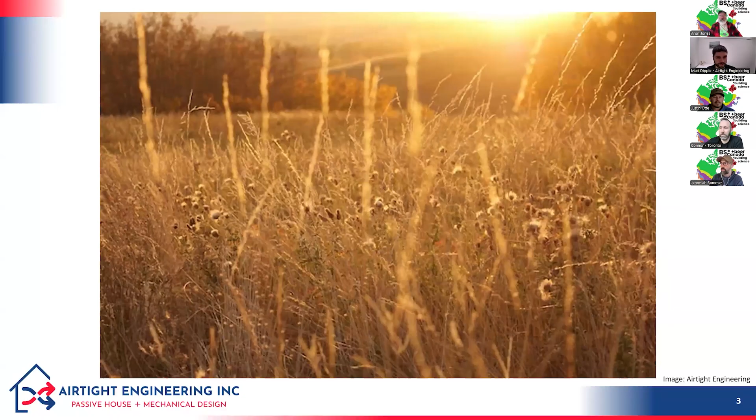Let me start by just a little land acknowledgement. I'm on Treaty 4 territory here in Regina. And so I know that we're all spread over the country, but I'm in the homeland of the Cree, the Saulteaux, Dakota, Nakota, Lakota, and also the homeland of the Métis people as well. And it's a picture that one of my colleagues took. I think this is his farm. His farm is on Treaty 6 territory, but a pretty nice prairie golden hour photo for you.

So here's my 5 themes that I want to talk about today. So first, client expectations. This is something that we've been learning lessons in, some the hard way, in terms of building high performance, and people who are used to a certain type of building and are now living in or working in or occupying a different type of building. Because lots of us don't come from high performance buildings when we first buy a passive house or a tier 4, step 4 home, or step 5 or tier 5 home, or net zero, that type of thing. That hasn't been our experience necessarily in the buildings that we've grown up or worked and played in.

The second thing I want to talk about is moisture in cold climates. Just a few interesting things that we've learned dealing with moisture in high performance homes in cold climates.

Third, I want to talk about heat pumps. And then my last two topics are a little bit zoomy outy, kind of philosophical. The first one is not just good on paper. So how can I, as a designer and consultant, how do we translate things from design into an actual good building? And then finally, how to think again. So some lessons that I've been learning very recently on changing or maybe not changing the way that I think about things, or helping other people change the way that they think about things, such as building science. So that's what I'm going to go for.

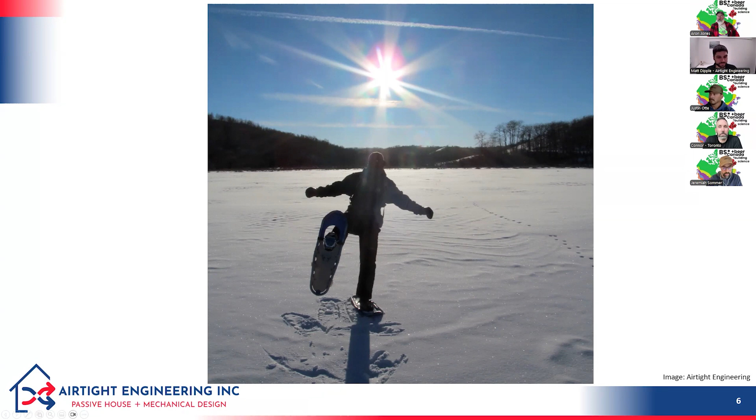Okay, theme number 1 that I want to talk about is client expectations. Let's do the first example. This is a project that Justin knows, actually, and it's a project that we visited together a couple weeks ago. It's a house in Saskatchewan, not too far outside Regina. And they've been having some troubles with cooling. The owner of the house, his thermostat is set to 21 degrees, and his cooling system will only cool the house to 22 degrees. Now it's a heat pump, a water-based system, so it's an air-to-water heat pump, and we were trying to figure out what the issue was.

But that's not what I want to focus on in this particular example. It was very interesting that he wants his house to be at 21 degrees, even if it's 35 degrees outside. And from a mechanical perspective, that's a pretty big ask. Often we're designing cooling systems to keep houses at 22, maybe more like 24 in the old days. The recommendation was peak conditions, you keep your house at 24. If your cooling system can do that, then it's good. But now there are clients who want their house to stay at 21 when it's 35 degrees outside.

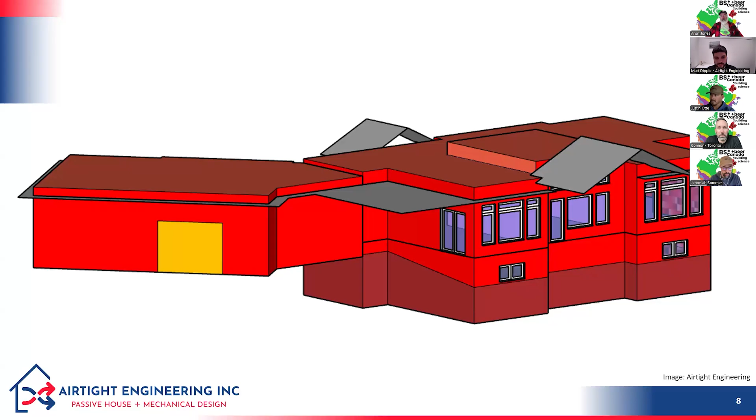Versus another project, this one's in Canmore. This is a passive house project in Canmore. The glazing on the second floor there is facing due south, but it's very overglazed on the second floor. And something that I found fascinating when I was at this project last week with this gentleman who was concerned about his home overheating by 1 degree above the set point was this Canmore house. The homeowner has maybe 10 days a year where it gets really hot up there. So it's usually in the spring or the fall when you have that low south sun coming in that big glazed window.

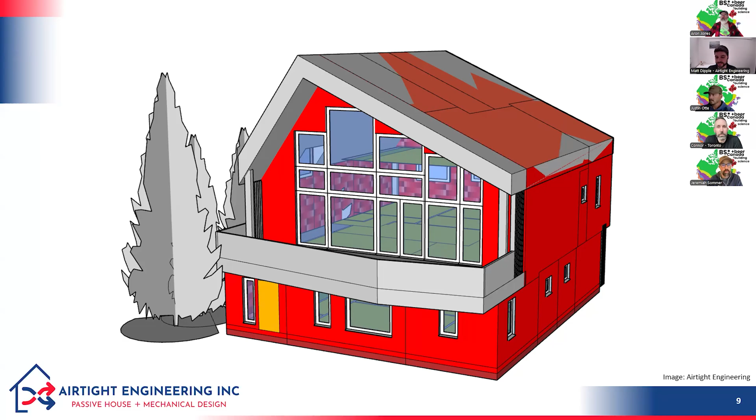And this is something that we had raised when we were doing the energy modeling for this house. We said, hey, look, you're doing really great in terms of meeting the passive house standard, but you're going to have a lot of troubles with overheating in that particular room just because it's quite overglazed compared to all the other rooms of the house. And they acknowledged that that was sort of a risk that they were willing to accept and went ahead and built the house.

And his attitude, he has 10 days a year where it gets up to like 28 degrees in there. And he said, I'm okay with it. It's only 10 days a year. It's not a big deal. We just keep the butter in the fridge those days. We don't leave it on the counter. And that was his solution. He was happy with it. No more work needed on this particular project.

So to me, this is a very interesting example of how much the client's expectations make a difference in terms of some of these high performance projects, and whether something like overheating is a callback or whether it's just, oh, here's a quirk of the house. So this is something that we've been trying to incorporate more into our practice, doing a better job up front when we're designing or consulting on a high performance home, of understanding what the client's requirements are. Like, are they going to be miffed if they're a degree off?

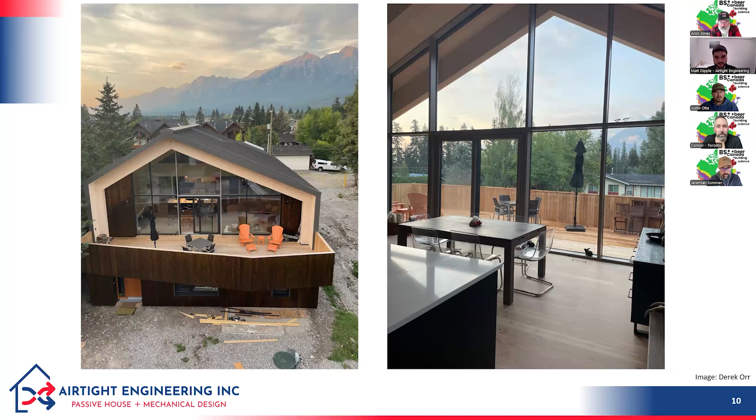And I'm saying that with no judgment. If you want your cooling system to be able to cool to 21, that is a perfectly legitimate desire, right? And for some people, that's a make or break, and for others, it's not important. So just an interesting example of how client preference drove one project to have some callback work required, another one to not have callback work required.

So the homeowner on this one assumed, hey, I'm going into a high performance home. It's super energy efficient. It's heated with this very tiny heat pump. I'm going to pay next to nothing on my energy bills. So they were very surprised when January rolled around and they had, I think it was like a $400 bill for their electricity. And something that we had not done a very good job of communicating up front was the impact in Saskatchewan of switching from natural gas heating to electricity.

And so on this project, their heat pump probably on average is like 200% efficient over the course of the year. However, natural gas is 7 times cheaper than electricity in Saskatchewan. So if you do the math, you're still paying 3.5 times as much for your energy if you're heating with an electric heat pump versus with natural gas. And they also weren't used to seeing heating and hot water on their electricity bill, right? They're used to that coming as a separate bill.

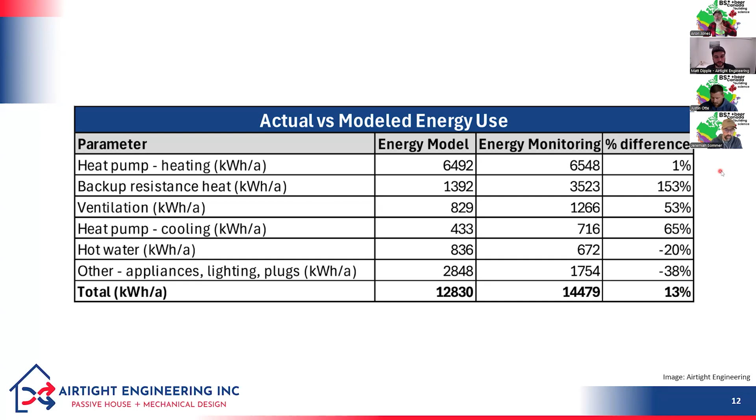So that's something that we've learned with high performance homes and something that we're really clear with people at the outset about now. Of course, your mileage may vary depending on where you are and what your power versus your natural gas or other fuel costs are.

Another lesson that we've been learning recently is to communicate more with clients up front on what they're expecting in terms of controls and functionality with their heating and cooling system. So I come from the passive house world where our mantra is spend on the envelope so you can save on the mechanical system. So I think that's a really good idea. And that's kind of what I encourage.

But it turns out that for some people, if you're building a very fancy custom home, maybe it's going to be net zero, maybe it's going to be passive, but it's a pretty expensive endeavor. Sometimes you have some pretty specific controls and zoning requirements too that you want to see in your project, even if me as the consultant from Passive House Land says, oh, you don't need any of those.

So here's two projects, the mechanical room on the left and the mechanical room on the right. These are two different projects. One's in Saskatchewan, the second one's in Edmonton. And they're both very energy efficient projects. The one on the left is a much bigger house. But interestingly, the one on the left, they wanted a lot of zoning. So if you count our zone dampers here, got 1, 2, 3, 4, 5, 6, 7, 8, 9.

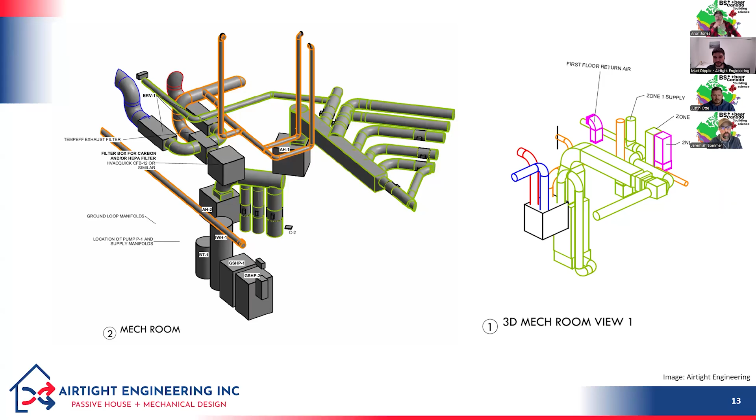And so, yeah, it was an interesting exercise for me to see how much 2 different clients, both building high performance homes, can have an impact on the design of the mechanical system in terms of controls, and how the opinions of the homeowners may differ greatly from my opinion as the consultant on what I think is best. So a good lesson for me.

And I think that this all came about, our obsession with zoning, when we started doing the whole dual zone in cars, right? Where it's like, oh man, somehow you can have these 2 knobs right beside each other, and there's some invisible air wall between the passenger and the driver's seat. And you've got yours cranked up 6 degrees higher than the other one. There's no way I believe that that's actually happening. But I'm blaming it on the car manufacturers, why we've got these high expectations in terms of controls in our homes.

So that's one of the areas where we have been doing a lot of learning and trying to improve our practice, in helping understand customer expectations at the start, and then also working on setting customer expectations out of the gate, right? So something like, okay, if you want a system that's not zoned at all and you have a 2-story house, that's great. Just know that it's going to be a degree or 2 warmer on the second floor than the lower floor, and that's okay, as long as you know that that's not a bug, maybe it's more of a feature for you.

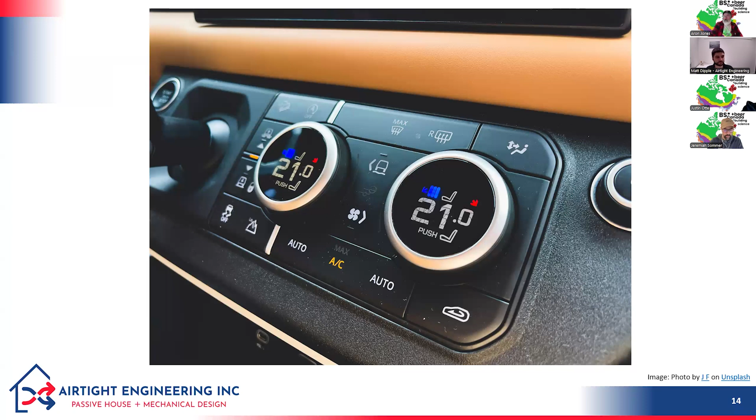Another thing that I'm just looking at: we need to invent cooling beds.

Hey, I remember my father talking about how they had a water bed back in the day, and you could heat and cool the water bed, different sides. The water bed was pre-me, but apparently, if you left the heater on the water bed off, it was very unpleasant, and it took like 8 hours to warm back up. So, would not recommend.

The second theme I want to talk about: a lot of these learnings are coming from a passive house project that we've been working on in Winnipeg that was finished a number of months ago and actually just received its certification, which I think might be the first certified passive house project in Winnipeg. I'm not positive, but if it's not the first, it's in the top two or three anyways. So we've got some learnings from that project in terms of dealing with moisture in cold climates, and a couple other projects as well.

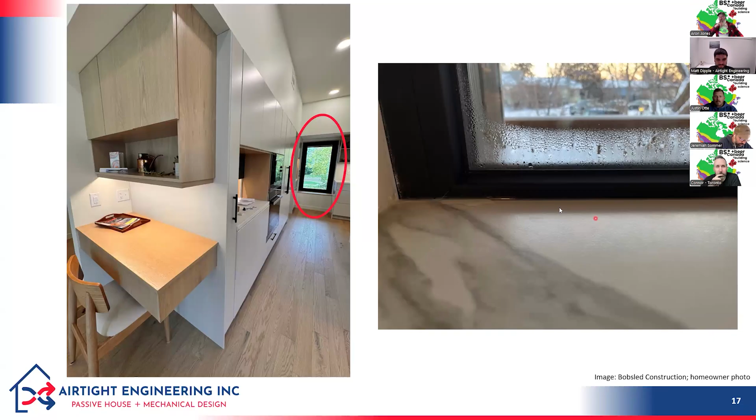So another issue that we ran into on this same project was another condensation issue, on the preheater. Because it's so cold in Winnipeg, Passive House requires continuous ventilation, and to do that, we need a preheater on most of the ventilation units out there. So this ventilation unit, it's a Zehnder, and it's got this nice little preheater to keep the air coming in at minus 10 degrees. That'll prevent the unit from going into a defrost cycle and stopping the flow of fresh air for a period of time.

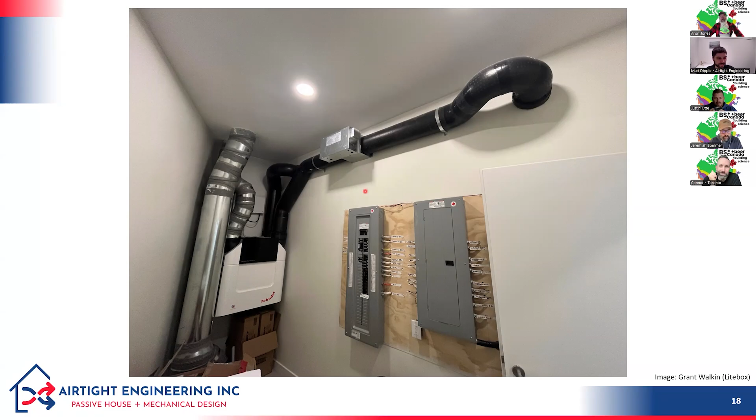But as you can imagine, this experienced some condensation. We did mention this at the outset, and it didn't get insulated initially, and so there was some condensation. Unfortunately, it happened right over the electrical panel, so that made it a little bit more urgent to address. The initial fix here was to insulate the section that the ductwork went through.

And we all thought, including me, okay, perfect, we solved the problem. The contractor did a great job. He insulated this section with some Armaflex, went away, and they still had condensation dripping out of it. What they found was it was actually condensation forming inside of the electrical box. Right here, you can see some ice building up even, because there was some airflow through this box, and this side is still really cold because it's not insulated.

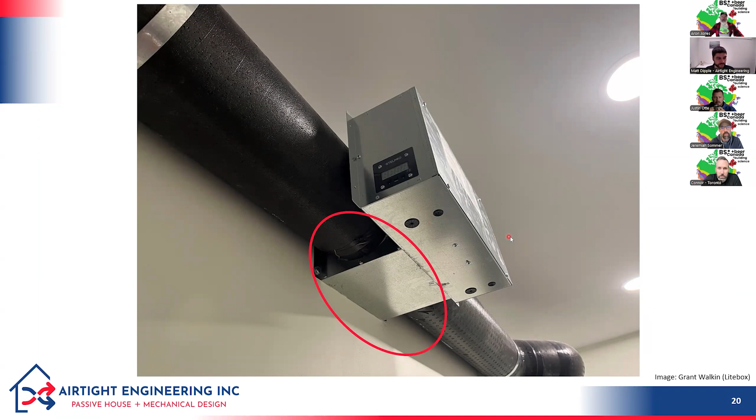So the solution was to tape this box and make it all airtight, and then to insulate the entire box. So here was the finished product, and this did the trick. They aren't having any water dripping on their electrical panel anymore. But this was way more intense of an insulation job than I would have expected.

Part of it is because my frame of reference for a mechanical room on the prairies is pretty dry. And this is a passive house, so even though it's a mechanical room with no people in it, it's a much more humid environment. It's maybe 30% relative humidity, as opposed to most of the mechanical rooms I find myself in, which are probably like 10% relative humidity. So there was just a lot more moisture available, and when that duct has any cold surfaces, especially as cold as minus 10, it's going to start to condense in a hurry.

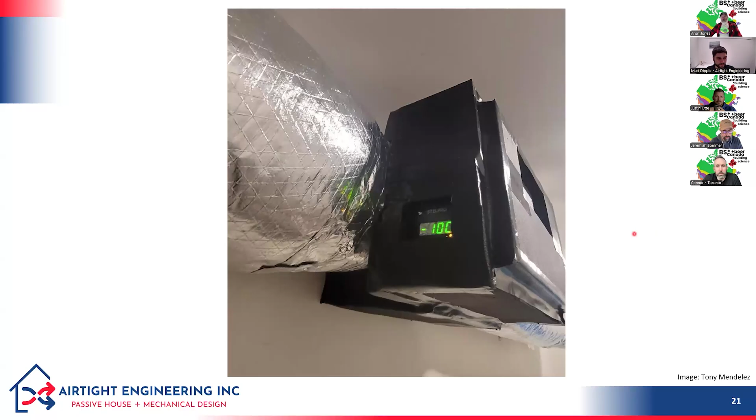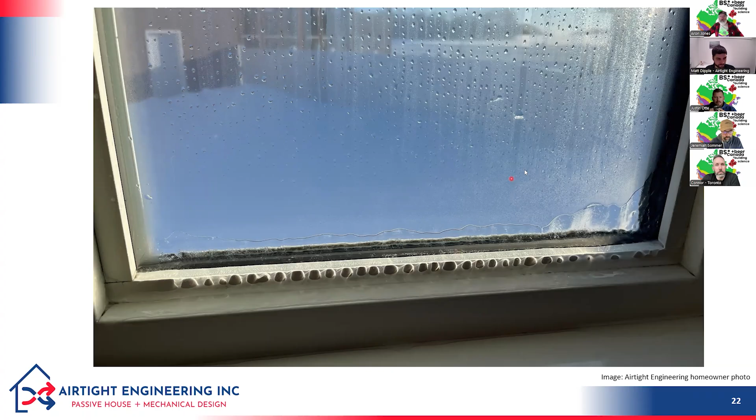This is a different project now. This one's about an hour and a half away from Regina. This was an existing house that was built, I think, 6 or 7 years ago, and the homeowner was having issues with condensation on their windows. Specifically in the winter, you can see there's a lot of condensation on this window, and it's freezing. It's creating some ice damming, and it was creating some mold behind the trim as well. So they were taking some trim off. I think they were unfortunately getting lawyers involved.

Our client wanted us to assess what the issue was. They were figuring that it was the quality of the windows; they were poor quality windows in their estimation, and that was what was causing all that condensation. So I did a bunch of work with them, reviewed a bunch of pictures, interviewed the owners. I was going to do an in-person inspection; however, there was a blizzard bad enough to close the highways, so we had to do a virtual inspection via Zoom, but that worked out pretty well too.

What I discovered was the windows were certainly playing a role, because they were triple pane as the homeowner had asked for, but they were the cheapest triple pane money could buy. They were air filled, and they didn't have any low-E coatings or anything. So yes, the windows were cold, but the bigger problem was that the family was from the southern US, and they found it really dry in Saskatchewan. And they had a big new HRV in their house, so when they ran the HRV in the winter, it dried out their house considerably.

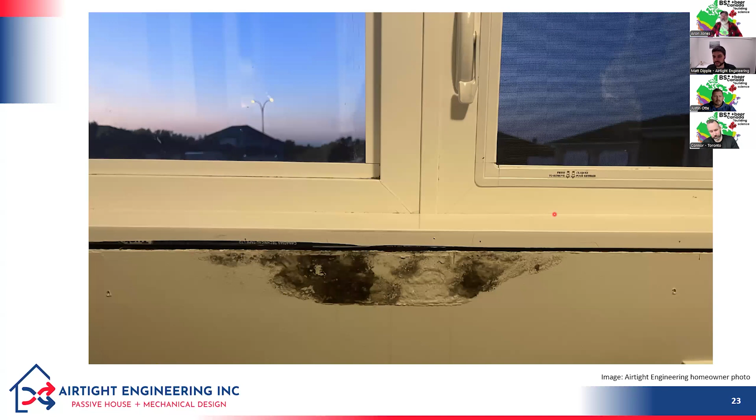So the lesson that I learned on this one is sometimes the obvious cause is actually not the full picture. And it was a really good lesson for me, or reminder, in this whole thing that we all talk about, this building as a system approach, right?

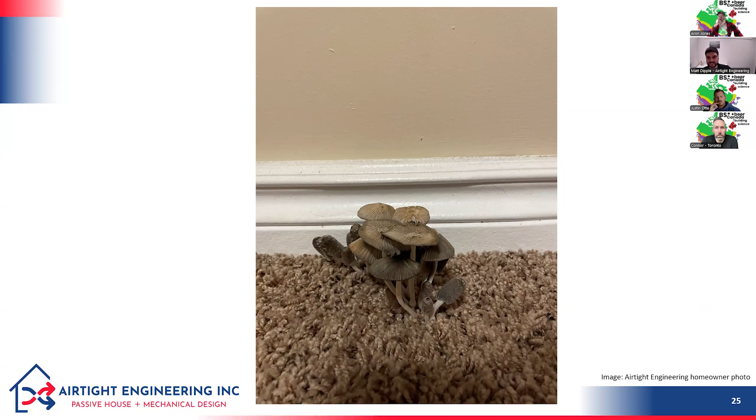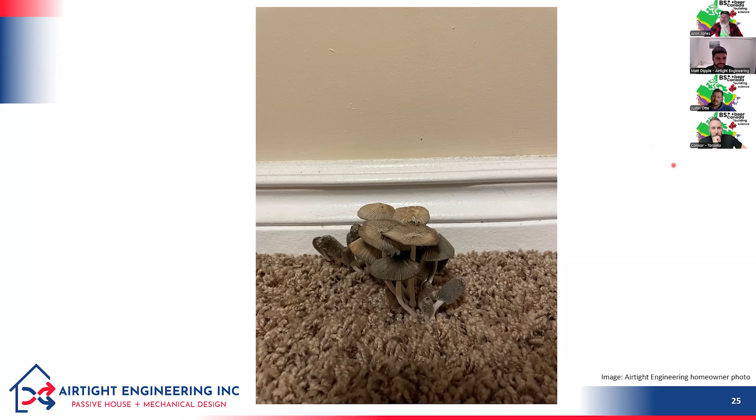And then this is just a fun picture, and slightly terrifying. This is what we're all trying to avoid in our projects. So this is not a project that we worked on, but this is a client in another capacity, and he moved out of this condo shortly after these mushrooms appeared. We asked if he tried any of them. He said no. And here's the zoom out.

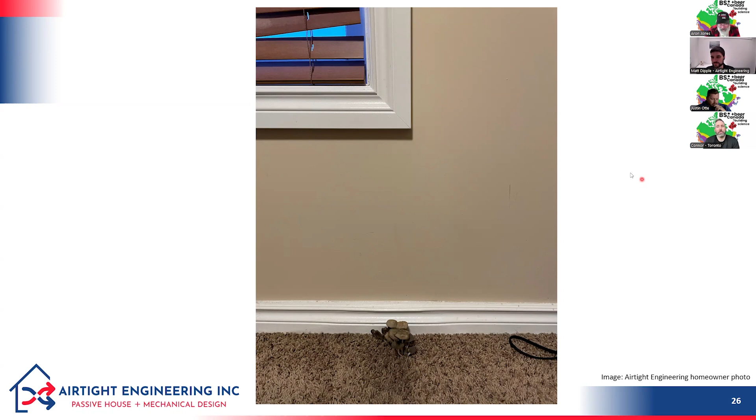So not surprising, it's happening right under the junction with a window. So likely, my guess is air leakage, some sort of poor sealing, air leakage in the winter, condensation, and then running back behind that drywall. You can see the molding's a little pudgy here too. So obviously some water going on there. So that's just a fun one. Only lessons learned here are don't eat the mushrooms in the carpet.

Yeah, that's right. And it could have been bulk water as well. Could have been poor flashing or something on the window for sure. I didn't have any pictures of it because the gentleman didn't send me any, but he did say when they pulled back the carpet, it was pretty bad. Mushrooms were not the only things growing under there.

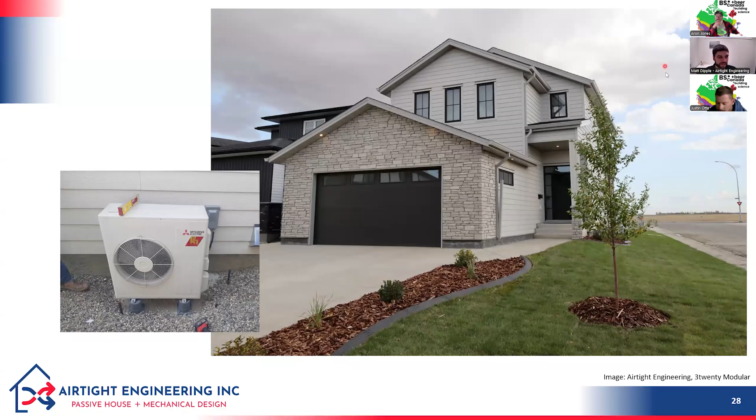Okay, let's talk a little bit about heat pumps. We're going back to the Saskatoon house and a lesson that we learned on the heat pump there, which was, heat pumps work in really cold weather. So this is a Mitsubishi Hyperheat, so it is a cold climate heat pump. It would be one of the most advanced cold climate heat pumps available.

I will say this was slightly puzzling because according to the manufacturer, it's supposed to cut out at -27, not -38. But proof of concept, the compressor was still generating heat 10 degrees below where it's supposed to cut out. So for all the naysayers about heat pumps in really cold places, they do work.

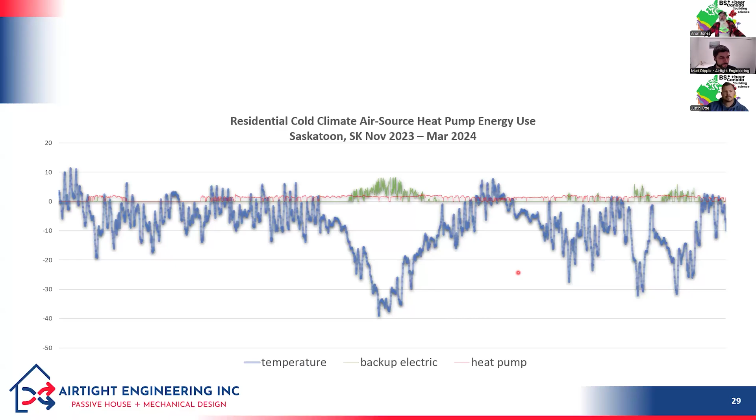A few other heat pump learnings in cold climates. Question: cuts out at -27 or COP is less than 1? On this particular unit, the COP is less than 1 at -27, but it should also cut out. That particular model is set to shut off the compressor at -27, apparently. So they did have to replace the board because it wasn't working.

This is a project that we did in Saskatchewan. It's called the Dumont Youth Lodge. So it's a youth lodge and camp close to Batoche, so not too far from Saskatoon, Saskatchewan. And this is an all-electric building. So it's heated and cooled with heat pumps. It's got some heat pump water heaters, and it's a pretty good envelope.

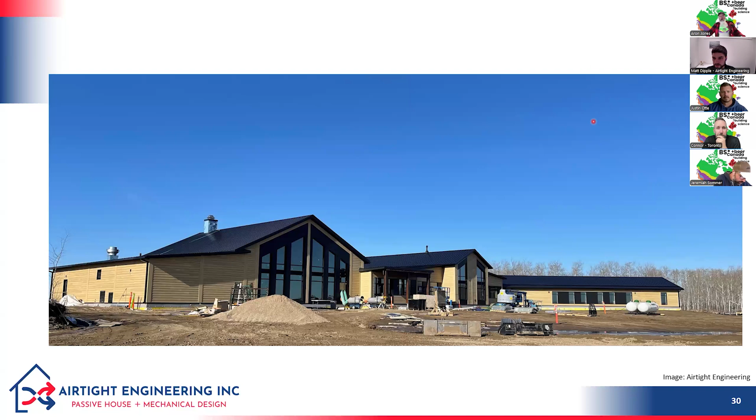It's maybe like walls are R40, crawl spaces are 25, roof is R80 to 90, somewhere in there. So it's quite a good envelope. And an issue that we had with the heat pumps on this one was ice buildup. So if any of you have done projects with heat pumps, especially in colder spots where you don't have a lot of thawing time during the winter, this can be a big challenge, is dealing with all of that condensate from those heat pumps. So this was sort of the perfect storm, the ice buildup on this particular project.

And that's because, first of all, these heat pumps were on the north side of the building, so none of the ice had any chance to kind of melt or sublimate when we got some warmer temperatures. Second of all, it's in a bit of a corner. And so what we realized was probably this wasn't just condensate from the heat pumps, it was probably also a snowdrift around these heat pumps that hadn't got cleared away as well. So there's maybe a bit of a maintenance issue in there as well, but certainly a consideration for us on future projects in terms of design. And so part of the concern was, is it gonna wreck anything or have any moisture wicking up behind siding or anything like that?

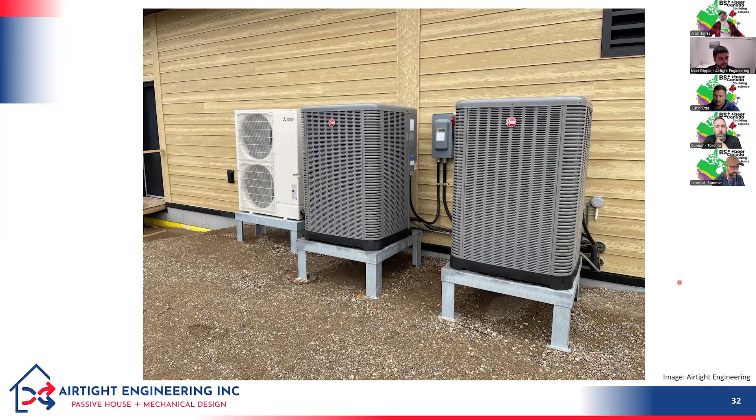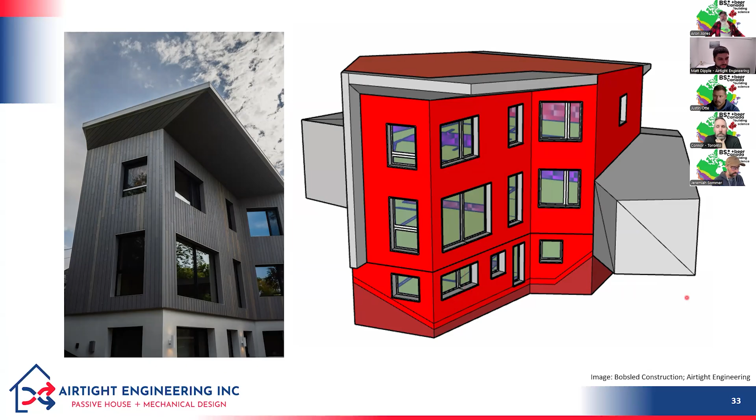Okay, back to the Winnipeg Passive House. This was a lesson learned on this one. We had said to locate the heat pump 2 feet off the ground. We had not specified on a stand in our drawings, but then when we were asked about it, we recommended, hey, we recommend this be put on a stand. However, it ended up getting put on some brackets. And in fact, Mitsubishi makes these brackets and sells them for hanging their heat pumps.

Turns out they work really well in Asia, where you have concrete buildings, but they don't work very well on wood frame buildings, where if you get a heat pump that's got the right frequency for that wall, it's going to create basically just like a huge speaker inside the house. And when that house is a passive house and it's super duper quiet inside, that's a big problem. So that was one of the first things that the occupants noticed, is that the heat pump was really loud and it sounded like it was coming from everywhere. And this was right on the other side of the living room. So as you can imagine, that did not go over very well.

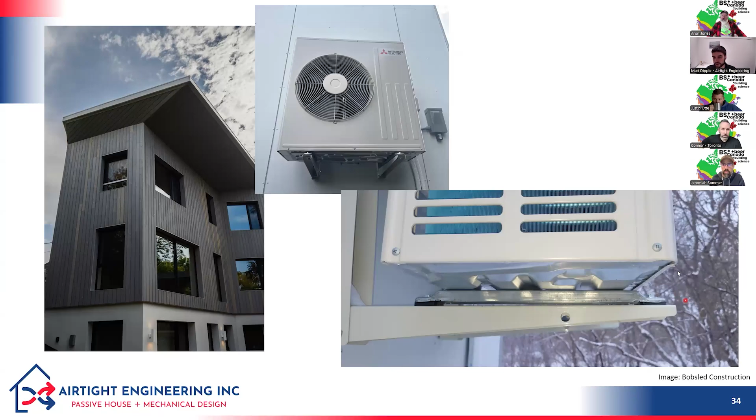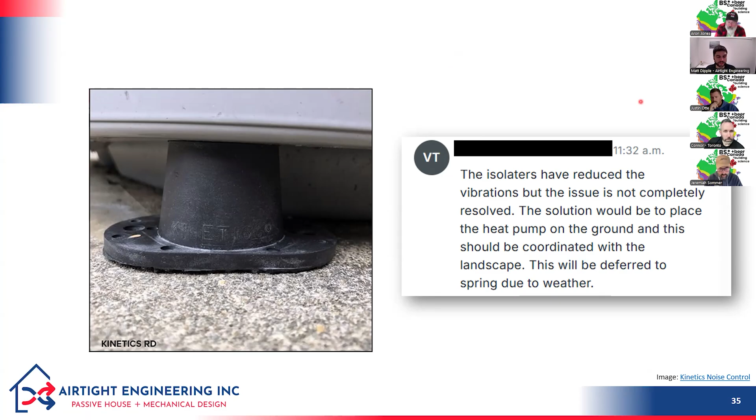So that's a good reminder. It's something that we always recommend as a first option: always locate a heat pump on the ground, especially with wood frame buildings. It's less of an issue if you have a commercial building where there's always background sounds happening, but if it's a home where people are sleeping or expect a little bit more silence, then that can be a challenge.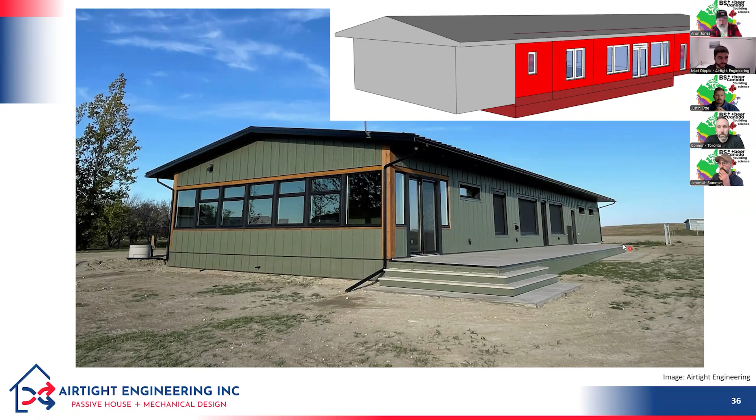And so the solution that we were able to use for cooling was this ground loop that Zehnder makes called the ComfoFond. And it doesn't have a heat pump, it just has a pump and brine going through this loop. And then it's got a coil, your fresh air comes in over that loop and then gets distributed through your house. So no compressors, just a pump and some water and some glycol. So kind of a cool solution.

And here's what it looks like in this project. So it's very passive inspired, as you can tell. This is that ComfoFond, so we just have the brine loop coming through. Here's the ERV, so it's spreading that cooling around the house in the summer. And then the ComfoFond also can preheat the air in the winter. And then it's got a little post heater in the winter on the ventilation air as well.

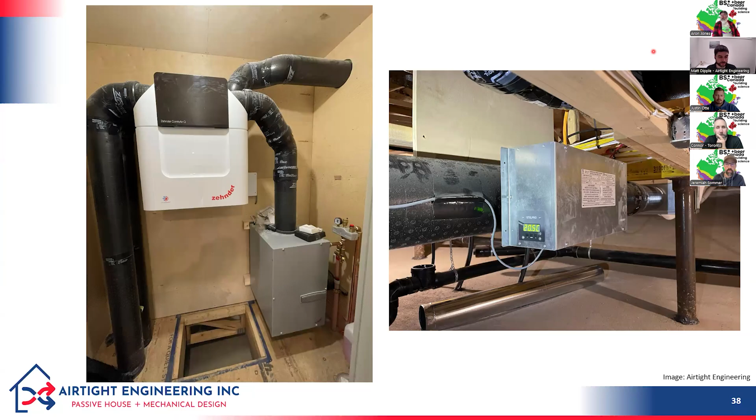So this was a cool project. I thought it was neat to see a project get so efficient, even in Saskatchewan's cold climate, that we could get away without a heat pump in the heating and cooling system. So I thought it'd be funny to end the heat pump section with a project with no heat pump in it.

Okay, my fourth theme is called Not Just Good on Paper, and this is something that we've been trying to get better at. So a lot of our focus has been on, how could we integrate envelope and mechanical and make sure we're designing something really good? And now we're realizing that we need to focus more on, especially in the residential market, how do we get that really good design from the paper drawings to the built environment?

Because there are pretty good processes for this, though there's always issues, with a commercial building, where as an engineer I have to sign off on a letter saying, yes, this building was built as per my design. So the owner has to get me to inspect their building and be happy with it before I provide that sign off. On a residential project, that's not the case.

So often what happens is we give a set of drawings to a client for a residential project, and we never hear from them again. And so we actually don't know what's happened. Has the building team understood our drawings? Were we clear? Did they understand and realize how it's all supposed to work together? And so the next few lessons learned and examples are some ways that has gone really well and some ways that has gone poorly on some of our projects.

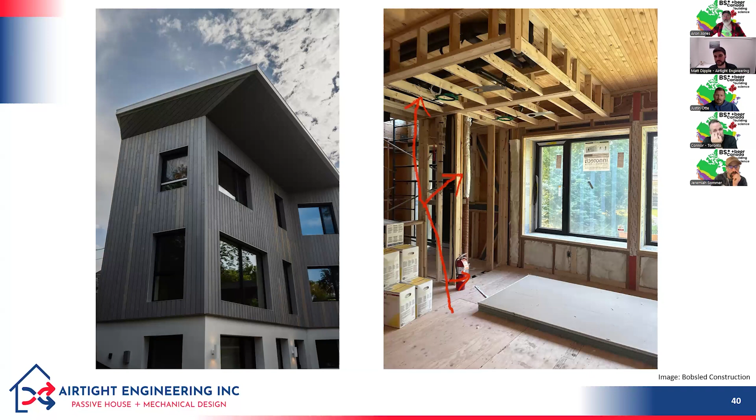And I realized that while we had done a good job of communicating this design approach to the design team, nobody had communicated this design approach to the plumber, aside from handing them a set of drawings, which asks them to do something that they'd never done before and that they knew was against code. What they didn't know was that there was an engineering report saying, here's our alternate solution, here's how we're going to comply with code. So that was a really good lesson for me in terms of how do we bridge that gap better between the design team and the construction team and make sure that we're all pulling together.

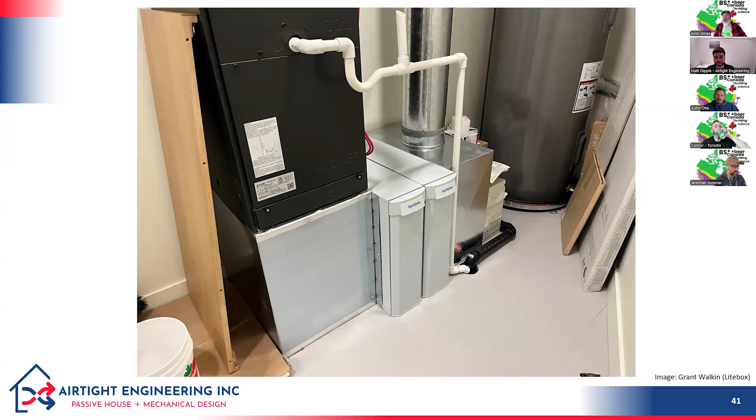This is another example of this. In the same project, we specified these really nice Aprilaire filters. Indoor air quality was really important on this one. And so we've got 2 filters. One is for a pre-filter, and the second one is for a really intense MERV 16 filter for wildfire season. So the second filter box would remain empty until there's a wildfire, and then you shove a big 4-inch MERV 16 filter in there to reduce wildfire smoke in your home.

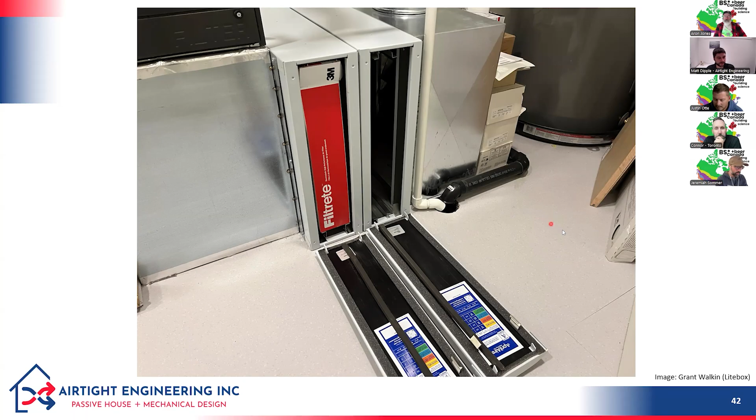And here's what ended up happening. Turns out the contractor wasn't able to get the Aprilaire filters that fit in with this rack. And so they bought these premium Aprilaire filter racks, and then they modified them and shoved cardboard Filtrete filters into them. You can see this one's already bent. So obviously this was not a good solution, but we could have had a little more dialogue between the construction team and the design team on, hey, I can't get those filters. Can I put in a different filter rack instead of the Aprilaire filters? Great, let's do that, as opposed to putting in the Aprilaire filter racks and then putting a different filter in. So another good example of communication.

This is a different project. This is in Winnipeg. It's sort of an interpretive center, and it's going for Passive House certification. This is not a project that we worked on, but I presented on this with a panel in Winnipeg a couple months back at a mechanical contractors conference.

And something that I heard from a bunch of the mechanical contractors that worked on this project that I thought was really fascinating was about 4 of them brought up the fact that the space they had to run their ducts and their pipes and all of that was so tight. None of them mentioned that the Passive House aspect of it was challenging. The thing that was challenging was the fact that they didn't get enough room to put in their ductwork.

So a good reminder that even if it looks good and works on paper in the CAD program, somebody still has to fit their hands in there to put the duct in. So that's something that we're always working on when we're working on high performance projects, is working with the construction team too, to say, hey, how can we make your life easier as opposed to more painful when you're trying to make our designs happen in the field.

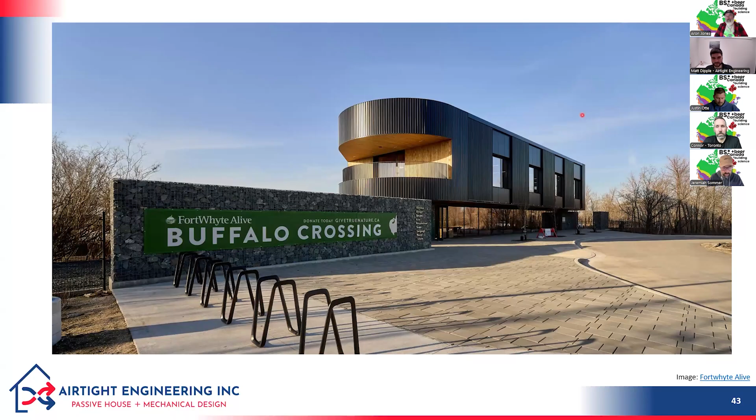And a place that we've had some really good success with that is we've done a ton of work with this company called 320 Modular out of Saskatoon. So they do mostly commercial modular buildings. So they'll do like school portables, they'll do First Nations band offices, they'll do multi-unit residential buildings, and they've got an integrated design and construction approach. So often they're bidding a design build for their projects, and they will stick with the same team.

So we've worked now on, I think we're over 100 projects with them, and their mechanical contractor is the same contractor every time. And so we know everyone on the mechanical team. We know all of the designers in 320, and there's a lot of phone calls that happen. And the great thing is, because we work on these projects over and over together with the same team, we get to iterate, right?

So if we do something on a project, we're talking with the mechanical guys and saying, hey, how did that work? Were there parts of that that could go better? Were there parts of that that you really liked? How can we make sure it's better on the next one? And then when we build the next band office or school portable or what have you with that team, we can make sure that in our design drawings, we're incorporating some of the feedback from the construction guys on what they liked or what they didn't like. So that's been a really cool partnership that we've had over the past few years.

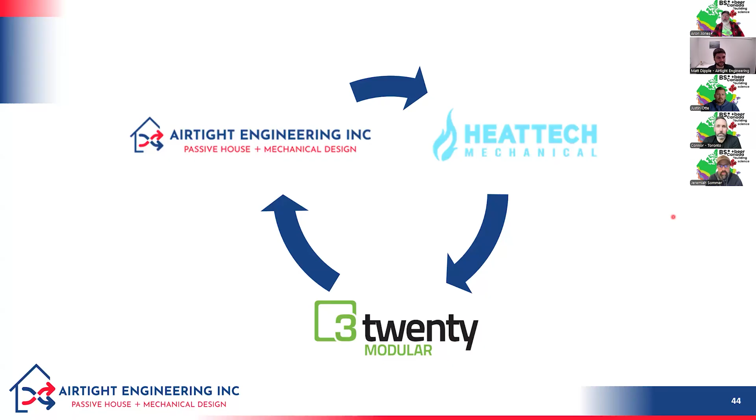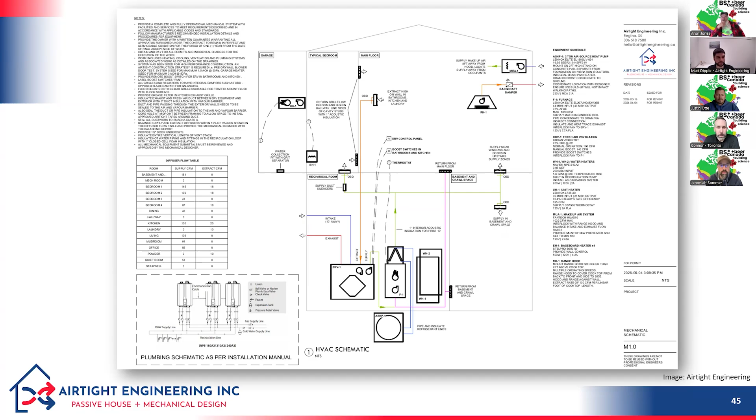And then here's a project where things frustratingly did not go quite as well. We sent off this schematic drawing. This is a single family home. We specified an ERV for the ventilation. We said we want an ERV. Here's the model number. Here's the size. Put in an ERV. And the mechanical contractor came back and they said, here's the HRV that we're going to supply. And we said, nope, we want an ERV. And they said, nope, we're not going to put an ERV in. We're going to put an HRV in.

And so I sent an email, which I thought was diplomatic, and in there I said, my understanding and experience in our climate is that best practice is to install an ERV. I'm concerned an HRV will lead to indoor humidity that is too low in the winter and potentially too high in the summer, et cetera. So interestingly, the mechanical contractor said that he was concerned that the ERV would lead to condensation on the windows in the winter in this project.

He also told me that he's been installing HRVs for 20 years and he's never put an ERV into a house. So at that point, I was a little bit confused because I was unsure how he both was very positive that ERVs were bad, but also had never installed an ERV ever. So it seemed like those two were maybe not compatible with one another, but that was the case. And so, yeah, this was a challenge. We went back and forth with the builder and the contractor, and we talked to the client. And at a certain point, we said, hey, we can't make you put in an ERV unless the client is going to back us up on it.

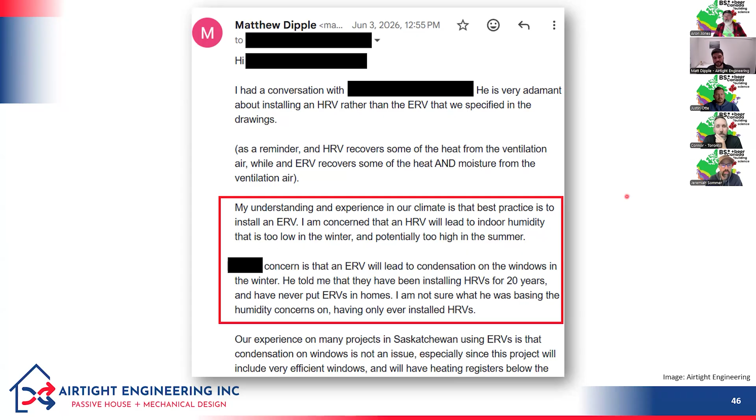So I've got a picture here of what paradise may look like, especially if you're from a cold country like Canada. So this could be what paradise looks like. And my question is, at the end of this section, how do we get closer to our amazing buildings paradise? And I do think that a big piece of it is continuing to work on communication between design and consulting teams and construction teams, and then feedback back up the ladder.

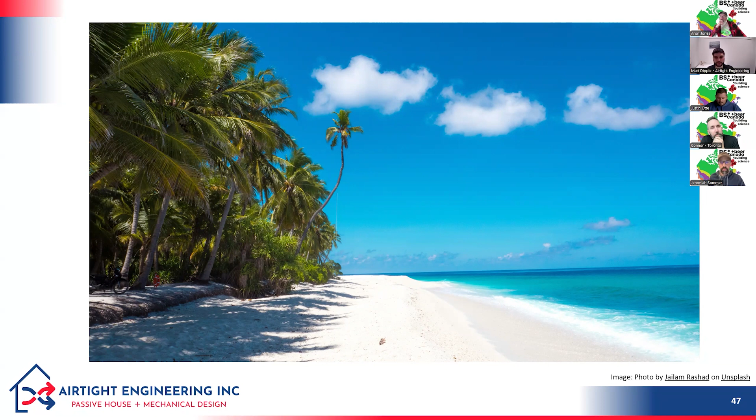So I know lots of times in high performance buildings, we're talking about integrated design teams, and I think that's great. I think that makes a big difference. That brings me to our final topic, which is how to think again. So I read this book last year called Think Again by Adam Grant. And it's all about how do we not get stuck in a particular idea and refuse to change our minds even when we're wrong. So that's sort of the thrust of his book.

So the first part is, how do you personally, as the reader, not get stuck in a certain idea which may be wrong? And then the second part is, how are you more effective in convincing other people that they might be wrong on something if they're stuck in a certain way of thinking? So this is one of the figures that he has in the book.

He talks about the overconfidence cycle, how we can often get into this cycle where we've got a conviction and we end up with some confirmation bias. So we only read the things that support our conclusions. And then we figure, oh, that's validation of my conclusion. And then we become even more proud at how right we are. We just kind of roll around the loop.

And he talks about, as an antidote to this, the rethinking cycle. So how can we be more humble about our positions? And how can we embrace doubt, look for curiosity, and then discover that maybe there's more to it than we thought? So a couple of the things that he highlights that can help us move from overconfidence to rethinking, and I'm applying this to myself in this coming up example, is we can look for areas of agreement and we can concede when we think someone else is right.

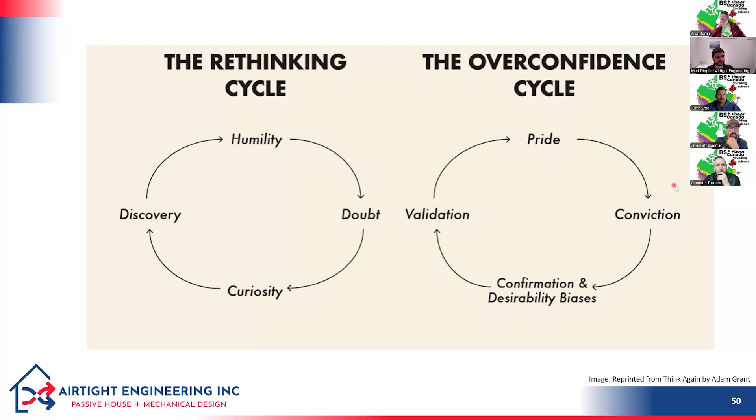So I'm going to revisit my last example that I was talking about, the whole ERV, HRV thing. So I ended up sending this email to the contractor. I said, okay, I think I understand. So it's not that you've had any bad experiences with ERVs, and more that you've not had the chance to work on any projects where an ERV has been used. Is there anything I can do, or information or examples I can provide, that would make you more comfortable with the operation benefits of an ERV?

And the contractor said, no, I would like to move forward with an HRV. And then there's maybe a little bit of frustration or annoyance, at least that's what I'm reading into: I mentioned this a long time ago. Thank you. Which for me was actually quite helpful, getting this response, because I didn't have to spend any more time trying to convince him, because what he was saying to me in his response was, no, I will not be convinced. So case closed.

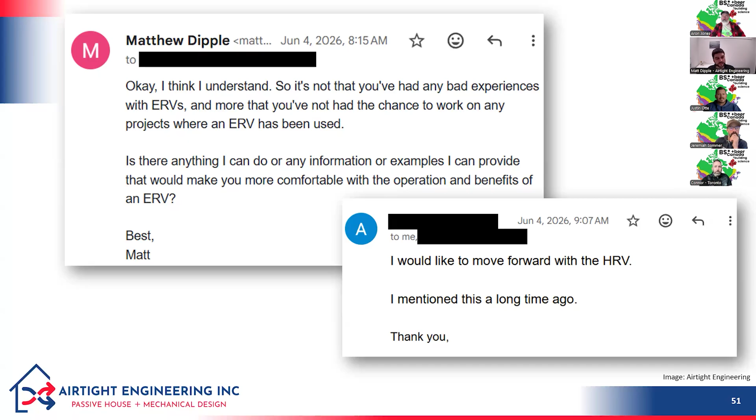And what that brought me to in this particular case with this client and this contractor was a bit of a rethinking cycle of how I approached it. So what are some of the things that I did that might have led to him being closed to the idea of trying out something new?

And some of it's beyond my control, but I realized at the outset, I did express some frustration to the general contractor about the mechanical contractor. And I said, oh, the mechanical contractor, he's just doing the thing he's always done. And I think that maybe rubbed the general contractor the wrong way, because he probably thought, hey, this paper pushing engineer is coming in here and telling me how to build this building and telling the mechanical contractor how to build this building. And so I think that the way I approached it initially got his hackles up a little bit right out of the gate.

Also, I didn't do a very good job of listening at the start when I was trying to express why we had designed with an ERV instead of an HRV. I told him why an ERV was good, and I didn't listen to what his concerns were about why an HRV might be better. And then finally, there is conflicting evidence out there. And there are times where an HRV is better.

So I thought this was really funny. Here's AI for you. So I Googled and used the AI overview and I said, first of all, ERV better in cold climate, question mark. And AI told me, yes, an ERV can be significantly better for a cold, dry climate like Saskatchewan's. Oh, it even knows where I live. That's creepy. And then I said, HRV better in cold climate. And AI told me, yes, again, yes, a heat recovery ventilator is often the superior choice for cold, dry climates.

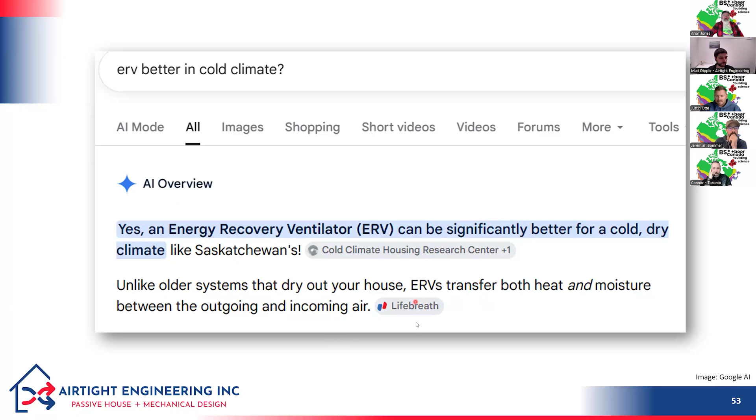What do you know? And they've got references they're citing. Turns out they cite Lifebreath both times. So Lifebreath is just crushing it in terms of search engine optimization, but not in terms of consistency on which is better in a cold climate. So I needed to acknowledge that this is a complex topic and there's conflicting advice.

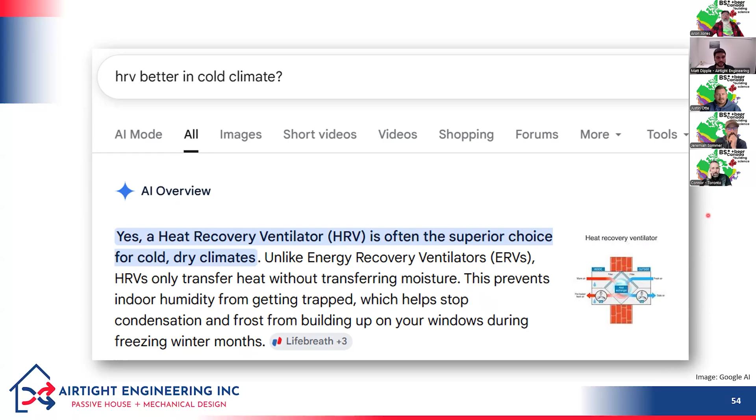So I went through this rethinking cycle and I realized I was frustrated with the outcome of this particular project and the fact that I had to back down on my recommendation and the contractor didn't want to listen to what I had to say. But there were some things that I could have done in my approach. I could have been less adversarial and a little bit more understanding of where the contractor is coming from as well.

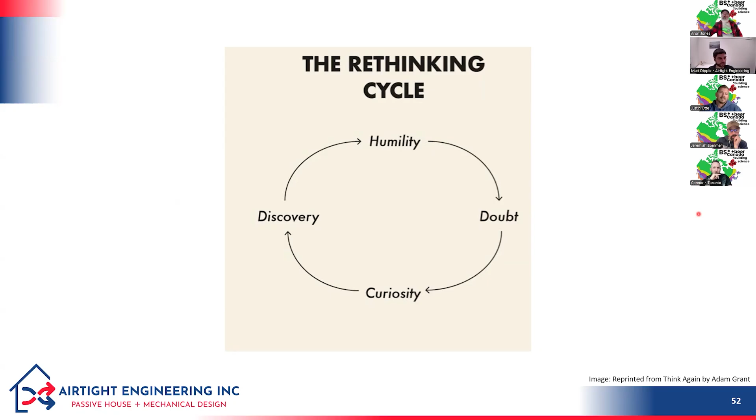Because if I can't do a good job of communicating that building science and helping the other people in the project team feel like they're part of this goal of working towards a better building, then it doesn't matter how many lessons I personally have learned in terms of making a better building.

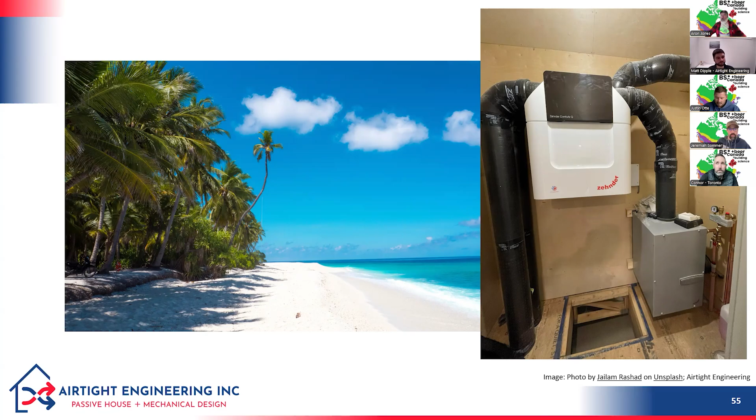So thanks. That was really high level. It was kind of a few bits and pieces of different places, but I hope that you enjoyed some of the lessons that our team has been learning, some of the things we've been trying out, and I hope that you enjoyed some of the pretty pictures and lack of bullet points as well.

I'm going to jump right in and I'm going to say, as soon as Justin has his voice back, we've got to get both of you back and we've got to talk about ground loops and Zehnders and how we're going to solve all of our energy issues that way. Because I think that's an excellent topic. Sounds good to me. But yeah, thank you, Matt. Absolutely. This has been amazing.

And for some of us, it is actually a very high level. One of the key things that I picked up along the way here was that your energy model on one of the projects was 13% off from the occupancy. And actually, I think that's a pretty tight number because how do you know how people are going to use your building? Yeah. For sure. You can model everything, you can model whatever you want, but you have no idea what that occupancy load is actually going to look like once people start to use that structure.